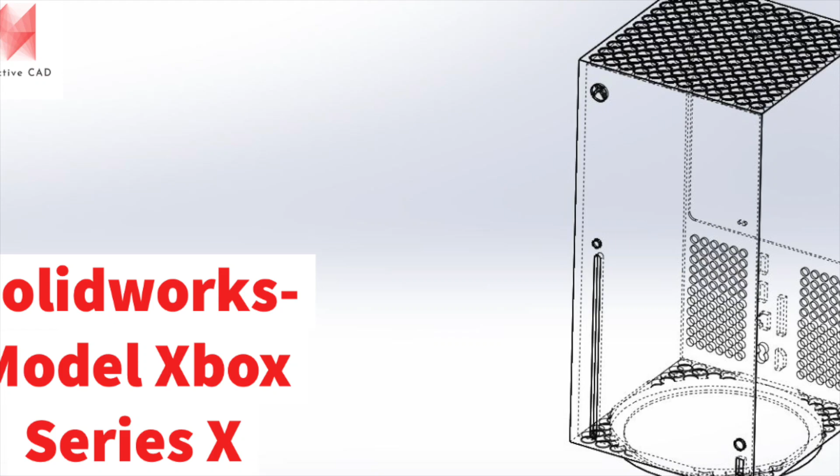Today I'm just going to do a quick video on how I go about drawing the new Xbox Series X in SolidWorks. It's a fairly simple shape, so it's not too complicated.

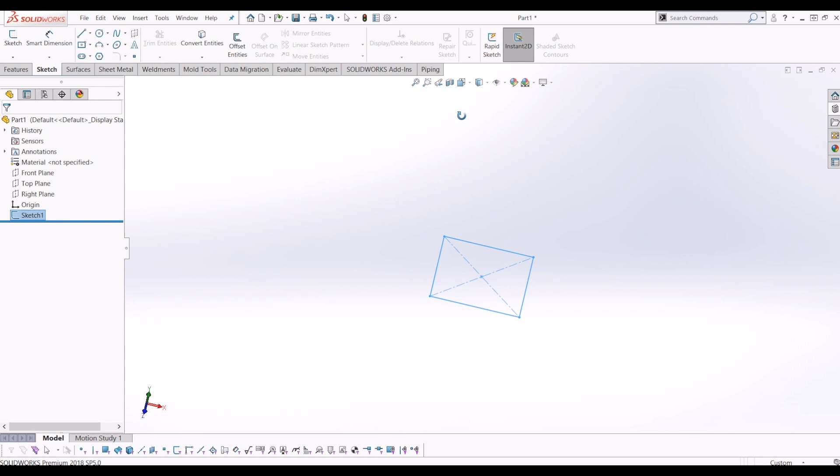Firstly I'd go to the top plane. Oh sorry, I've opened up a blank part file. And I go to the top plane, go to Sketch, and I'll just draw a box. I've got the rough, published dimensions of the Xbox, so I've got an idea of my scale. So 151 square, make that equal. I'll take that, and then I'm going to extrude down. So change the direction, 301.

Not 3.1, 301. There we go. So now, obviously, we're starting to get the base. That's the basic shape of the Xbox.

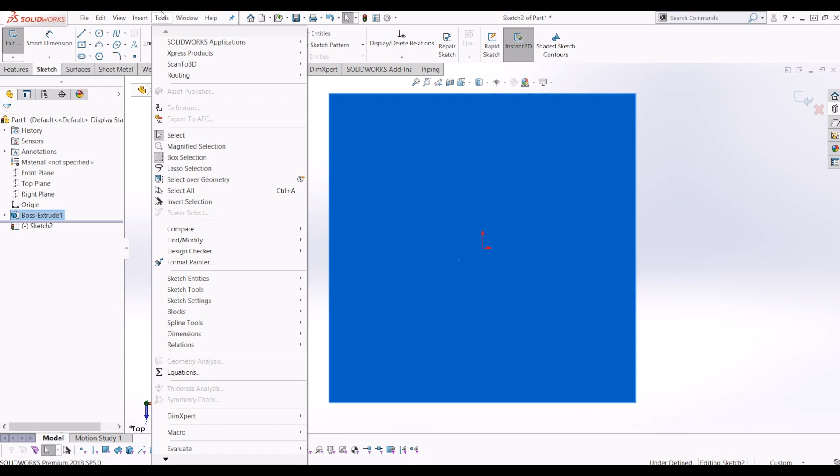But now I'm going to click on the top plane and add the finer detail. So I've just gone onto Sketch, and then I'm going to go to Tools, drop down to Sketch Tools, and go Sketch Picture. These are the pictures I've got to model the finer detailing of the Xbox without having the dims. As you can see, these are just Google image pictures. I've just Google searched Xbox Series X pictures, and these are the best I could find.

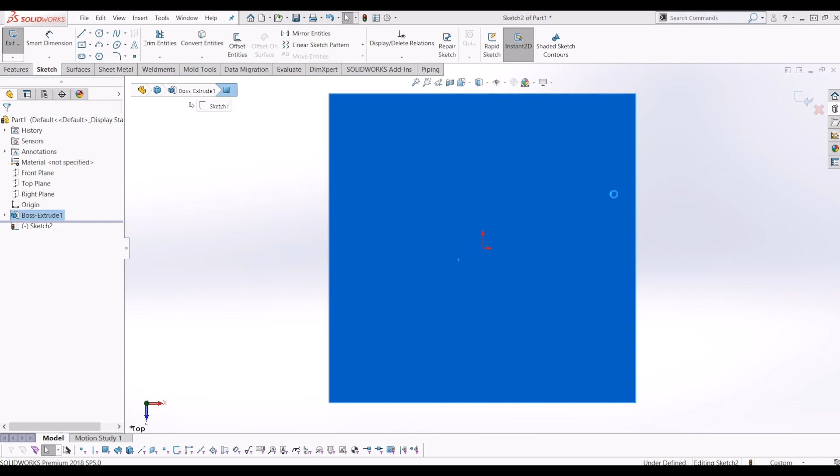So let's load that one in. And now we can actually trace around this picture. I've made this picture not ideal on purpose to show you how you can manipulate sketch pictures.

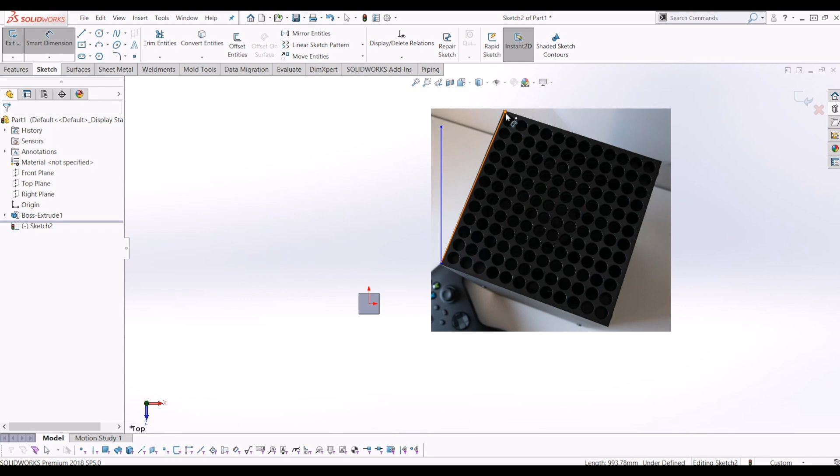So now I would actually exit this, tick that, then go to line and draw a line down the side of the Xbox and draw a horizontal line, and then just make that a bit neater. And then go to Smart Dimension and find out the angle. So 22.5 is the angle of the image. Double click the image to go back into your sketch picture.

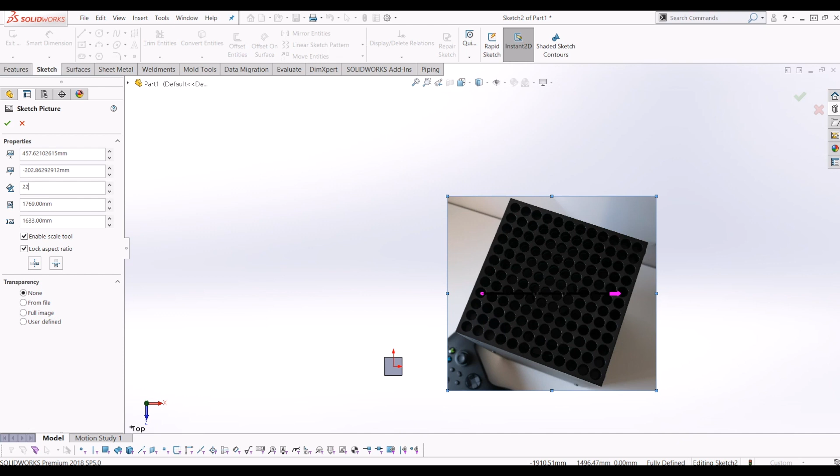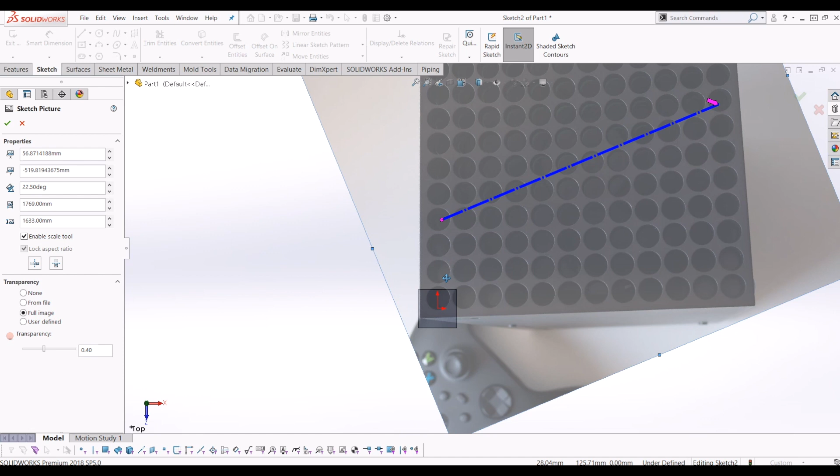I'm going to angle it at 22.5 degrees. So now I'm going to sit this picture and scale it down so I can use it as a reference on the actual model. From here, I'm going to go to transparency, full image, and then I'm just going to make it transparent so I could actually see the model. And then I'm going to drag it to the corner and scale it down.

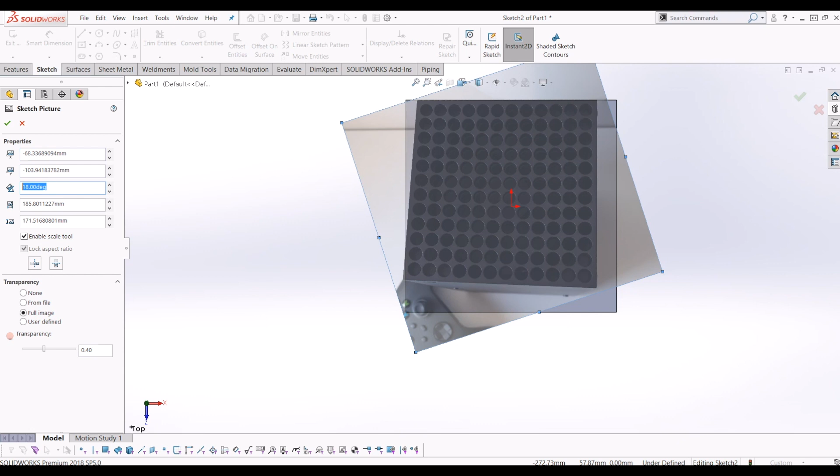Keep going, you might find that the angle's slightly off because this picture's not square, which you can see there, it's not perfect. So now if I make that, just fiddle with the angle a little bit. That's probably too much, try 19. So I'm going to just fiddle with this picture now and jump ahead, and then you'll obviously, by just editing the angle and the size, get it pretty much as flush as possible with the top of my model.

So I've just jumped ahead. That's probably the best I'm going to get it. If I just double click on the image, I've gone for 19 degrees and I've just changed the size of the image and kept it transparent. So I'm going to tick it.

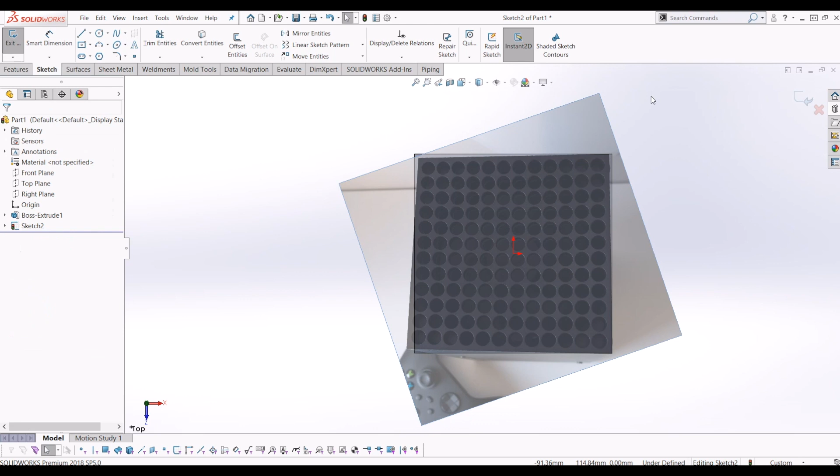I'm just going to quickly come out of this sketch and go to shell. So features, and then I'm going to go to shell. According to the internet, the casing's 6mm thick. And it's asking me for faces to remove. I don't want to remove any of these faces. So I'm just going to tick that, move it above my sketch.

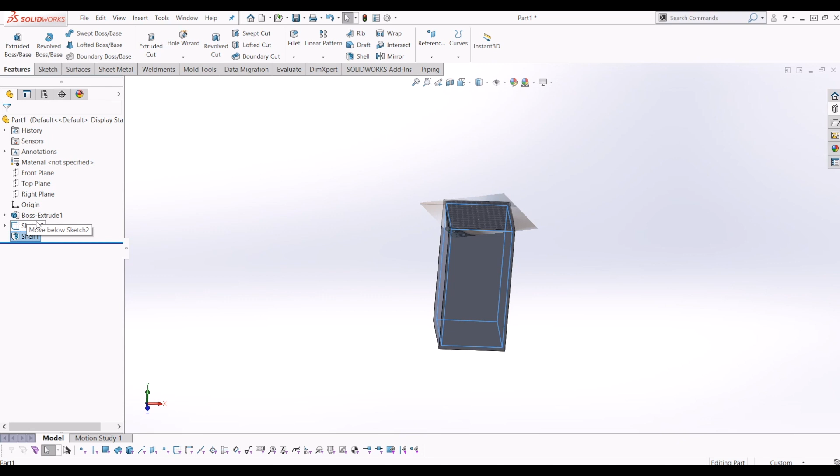And the shell has worked. You can see that now that's a hollow cube. If I put a section through it, just tick it, you can see that's now a hollow cube.

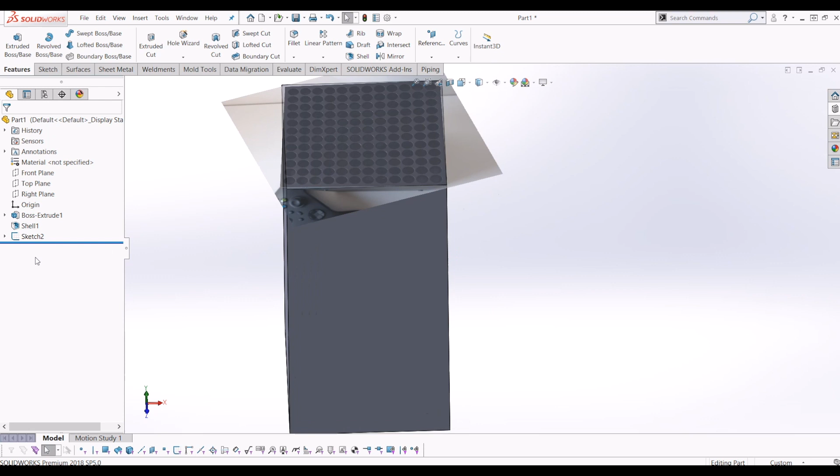So now I'm just going to go back into my top sketch with my reference picture. And I'm going to draw one circle. I'm going to do it 6mm radius, so 12mm diameter. And I'm going to do it looking at that. That's probably the best I'm going to get it for this reference picture.

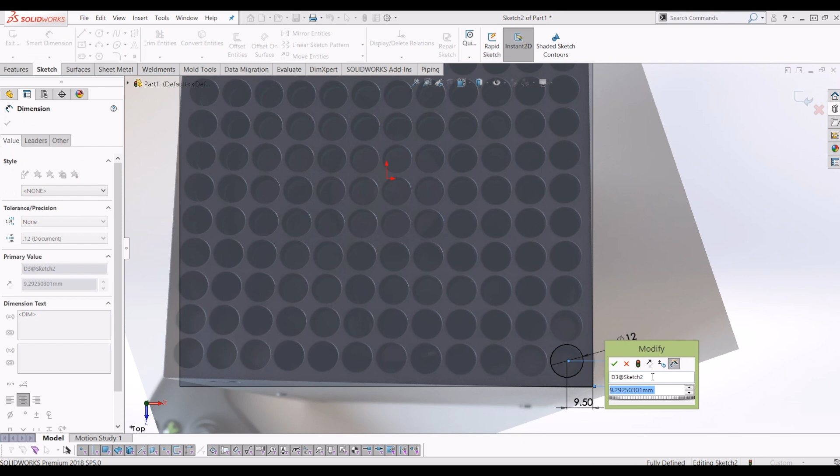Round it up to 9.5. So from there, I'm just going to go back to features and go to extrude cut. Click, and I'm going to go through all and tick it.

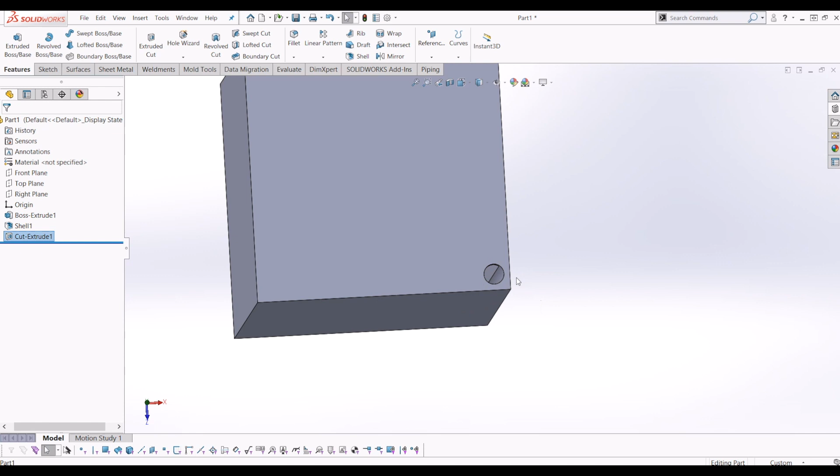So from there, I'm just going to put a little fillet on here. Not 10mm, 0.5. Little fillet on there as well. Tick that. So from there, I want to pattern my cut and my fillet. In fact, I'll put a fillet on the bottom as well.

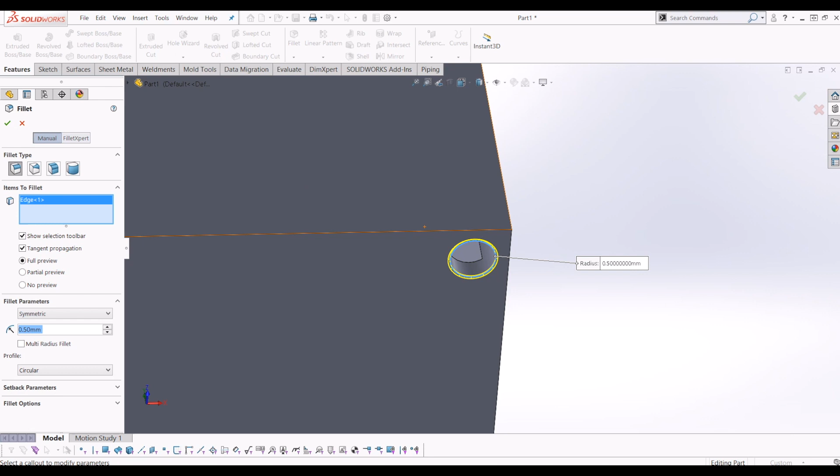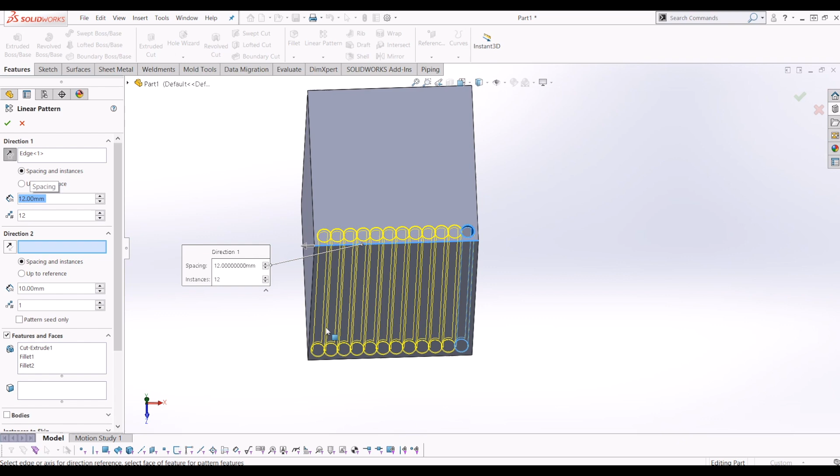Tick it. So from there, I'm going to pattern this - the cut extrude and the two fillets. So if I go up to linear pattern and click my direction, I want to go this way, and reverse the direction using the arrows. I'm going to put in 12mm apart, tick that - as you can see that won't work because they're overlapping, so I'm going to make the diameter of the circle a little bit smaller so it actually fits.

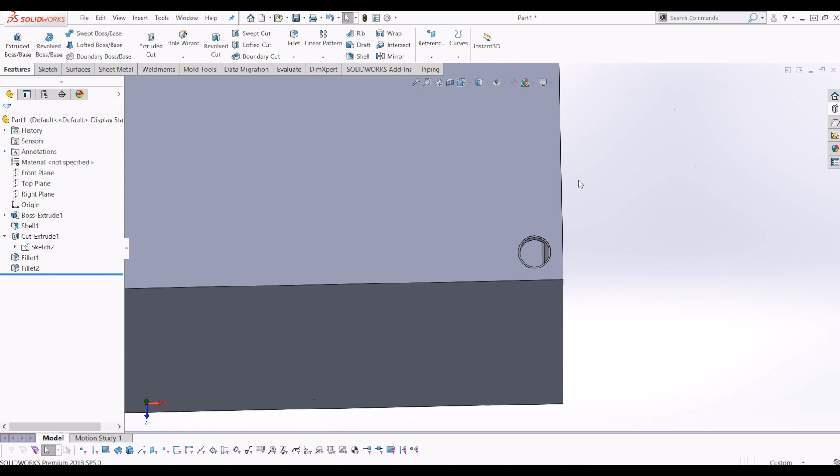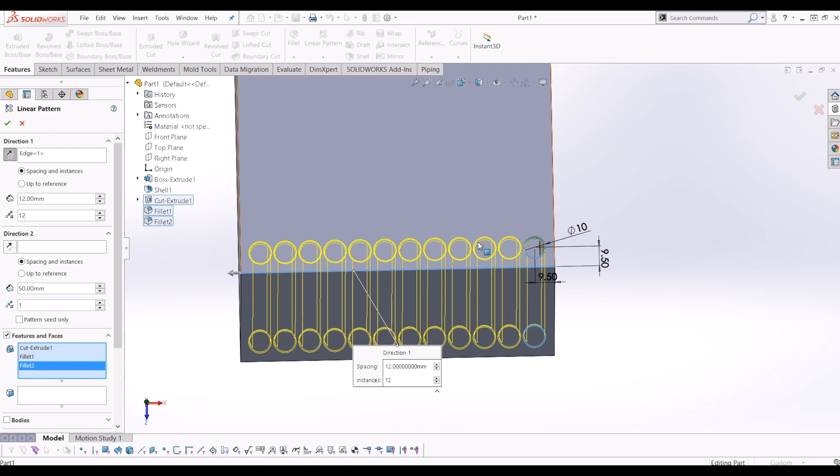So we'll go back to edit sketch, make the circle 10mm, and try that linear pattern again. So choose my direction and choose my features, which are the cut extrude and the two fillets, and do it 12mm - that's better. So I'm going to go in both directions - go to direction 2, click this line here, do the same again, 12mm, and tick it.

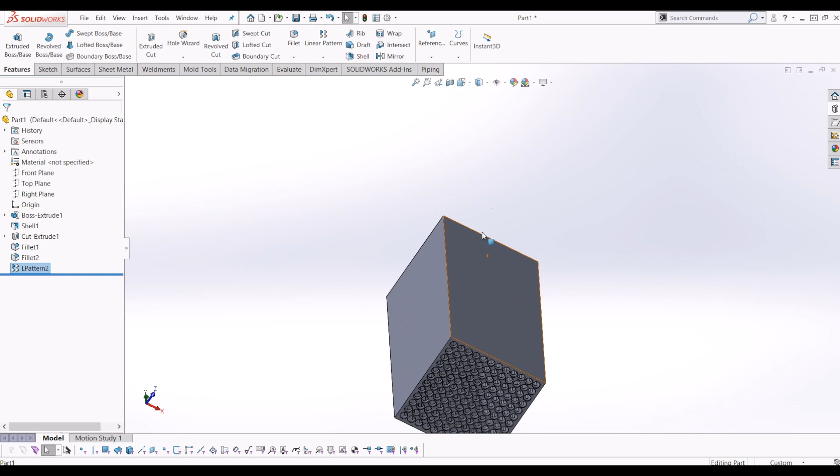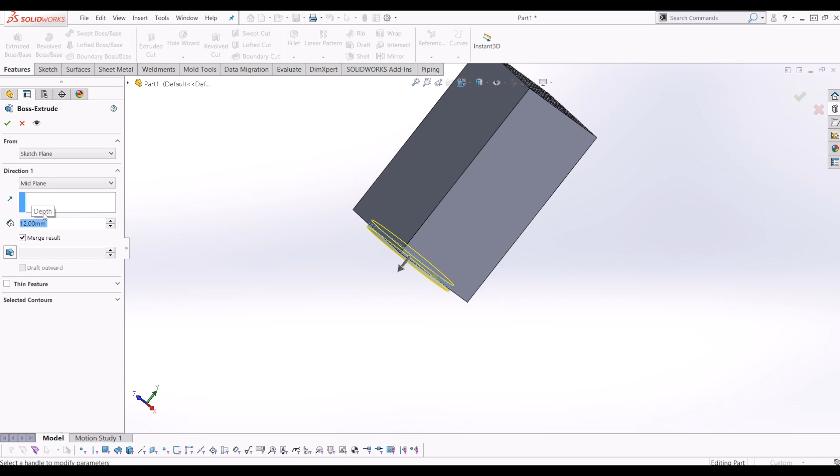Just let it load. So now I've put the vents in, and I'm going to go to the bottom of my Xbox. Just click the surface, go to sketch, and I'm going to put the base on. Click in the middle and extrude that base 6mm in both directions - go to mid plane and make it 12mm, so it's extruded out 6mm each side, and tick it.

And then just put a cut on the bottom of the Xbox as well, 10mm. Make that cut 6mm deep - no, sorry, we'll make it 2mm deep because it's only a little one.

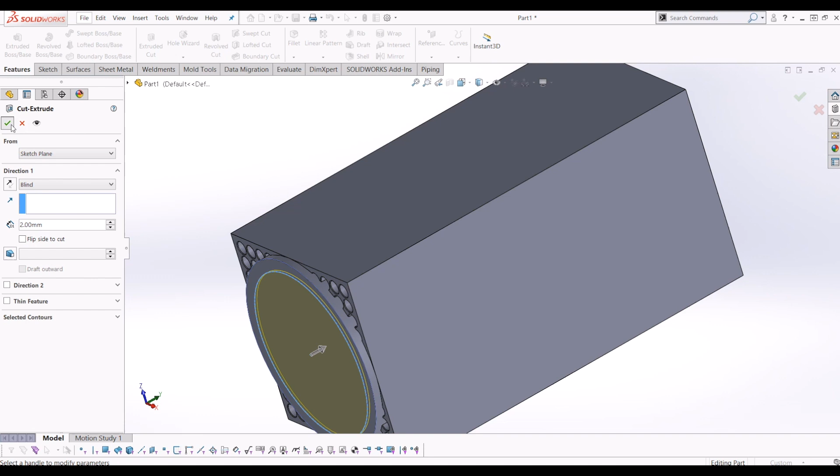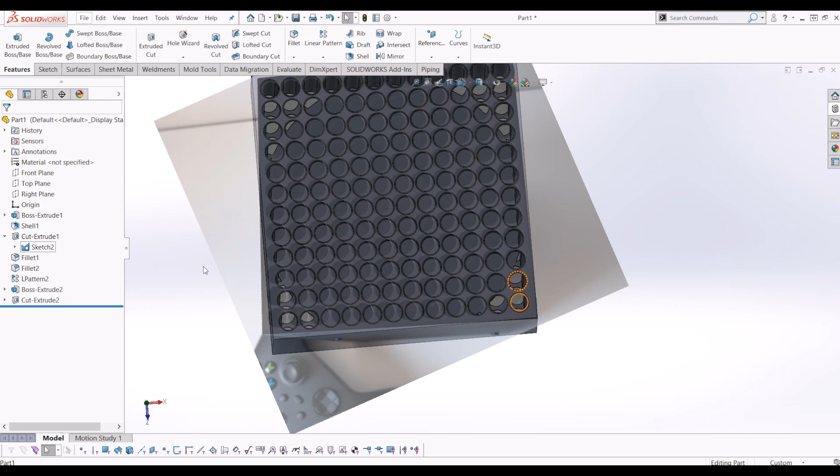So now if I go back to my cut sketch, just to give you an idea of how we're modeling it, I'll show that again. So now you can see I've got the grid. I know it's a bit out because obviously the picture's not square, but it's still a good reference on how many holes the Xbox actually has. So I'll hide that - so that's the vents on the bottom and the base modelled. I'll just hide that again and go to ISO view.

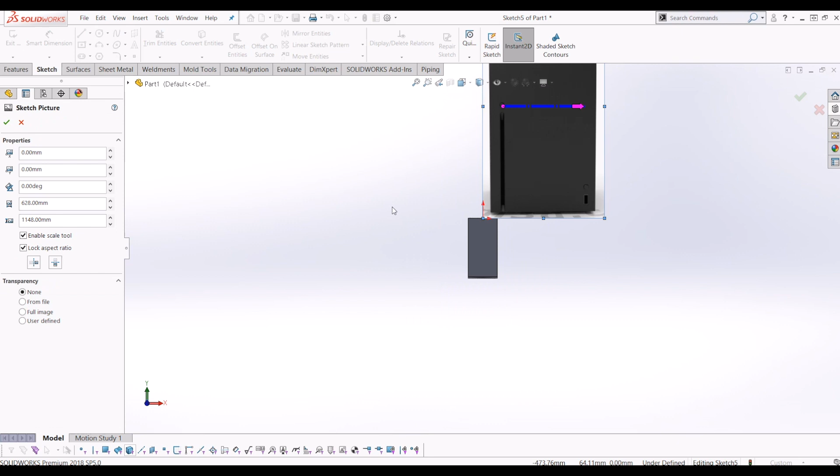So now I've modelled the vents on the bottom and the top. What I'm going to do is just go select the front - that's the front, click sketch. Now I'm going to go to tools again and drop down to sketch tools and go sketch picture. Select the front picture and do the same process again. I'll jump forward once I've tidied up and scaled down the picture. It's pretty self-explanatory again - go on full image to make it transparent. Your size is there, which you can change with your change in the graphics window, and your angle's there to change the angle.

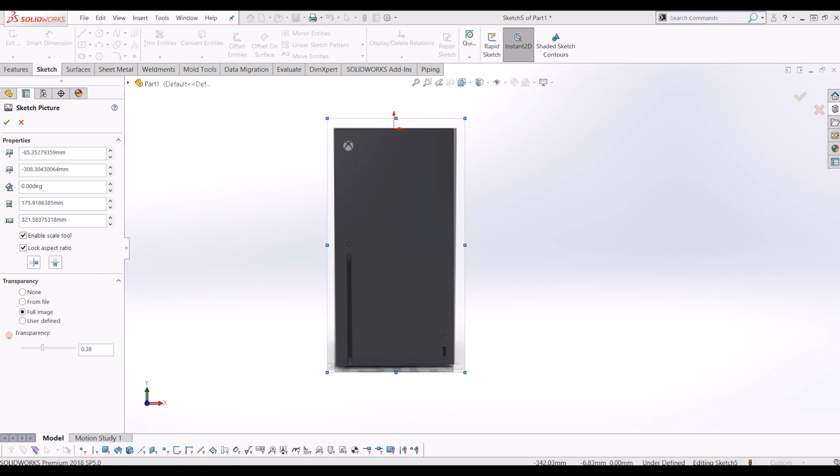So now I've lined it up, I'm going to create two sketches on the same face - one for the disk drive and the buttons, and one for the Xbox logo. So there's the sketch I've done.

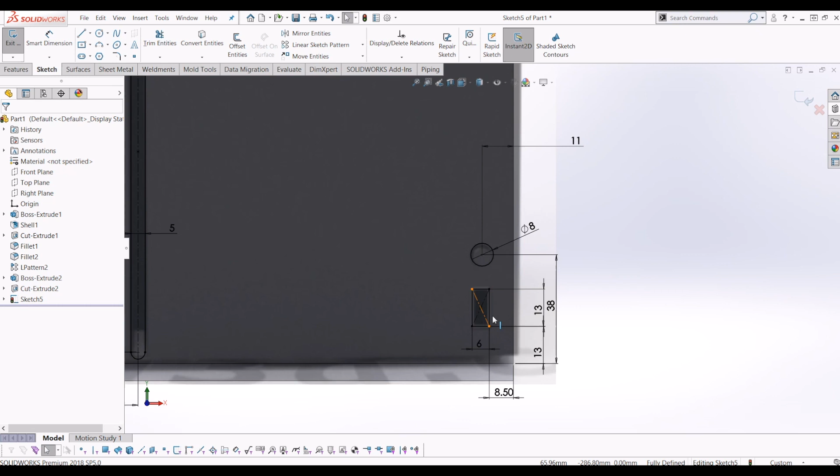So I've just done a slot - if you want to draw the slot, pause the video now, there's the dims I did it to. And down here for the USB and the button, I've done a square 6mm by 13mm and an 8mm button. So if you want to pause it there, just draw that bit up.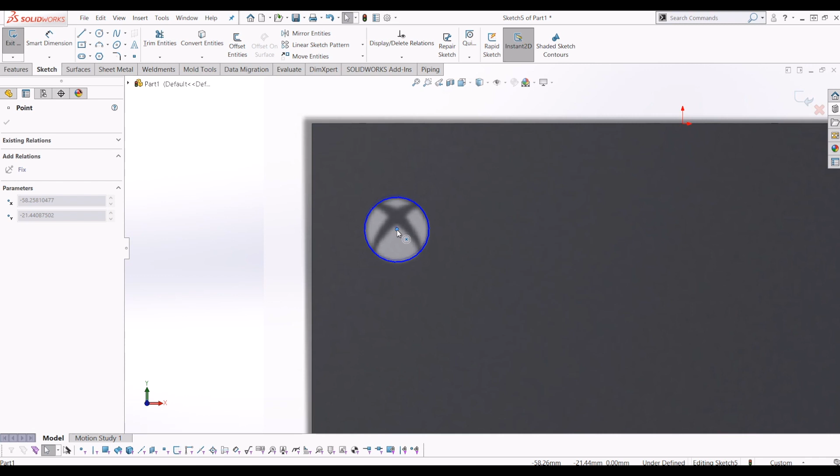And now I'm going to draw the Xbox logo. So if we just go to circle - if I zoom in, it gives an idea of the Xbox logo size. So it's 13mm I've got, and then I'm going to just define the circle from the edge - make it 22.

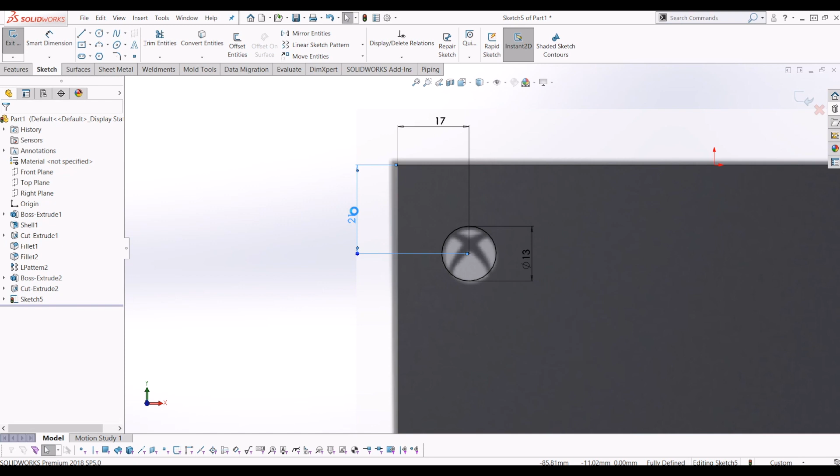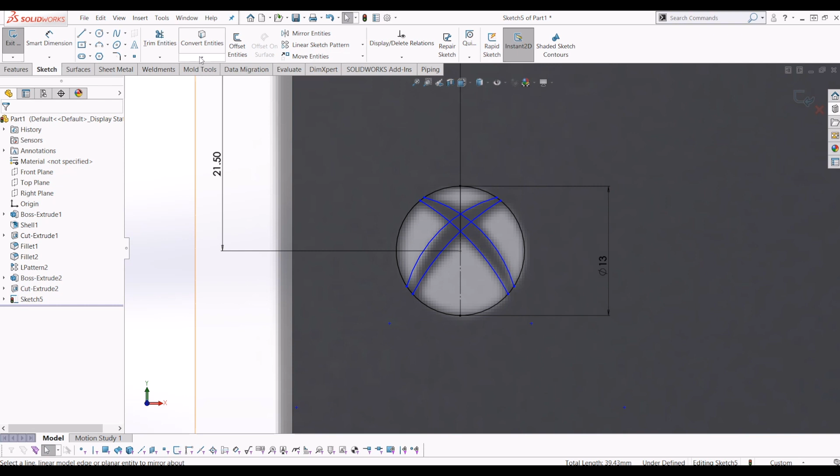And now I'm just going to draw in the actual X. So from there, I've just done two arcs, and then I've mirrored them around the center line of the circle. So tick that, and then I'm just going to trim here, here, here, and here to get the Xbox logo.

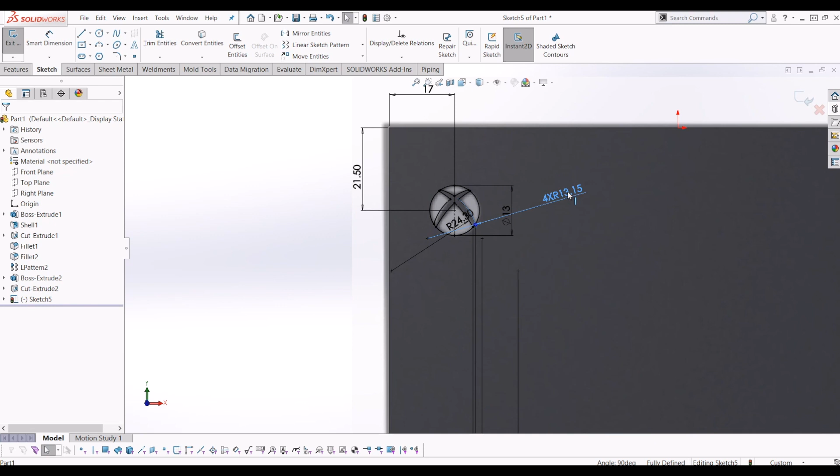Go up to display and delete relations, go fully defined sketch, and select the entities I want to fully define, and tick it. And there you go - it's putting some random dims just to fully define the sketch. Saves you watching me for hours defining the Xbox logo. So now if I come out of that, I'm going to use this sketch.

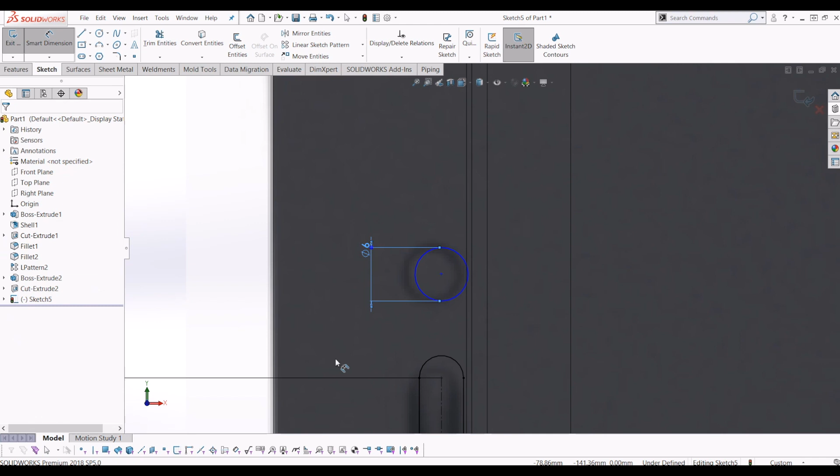Oh, I forgot, I'll just quickly go back in and draw that button - I forgot to put that button on. Just want to do it in line with the disk drive, even though it's a bit off because the picture's a bit off. So make that 6mm, just do it above the disk drive to 12mm, and move it to there - 19, that's fine. So tick that.

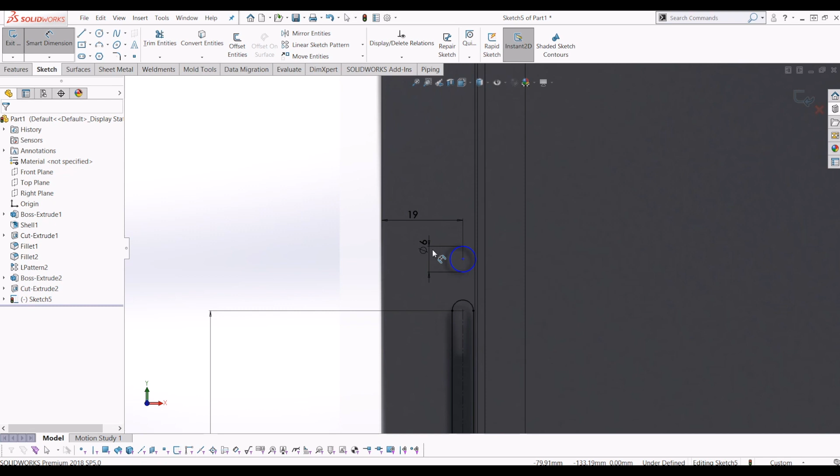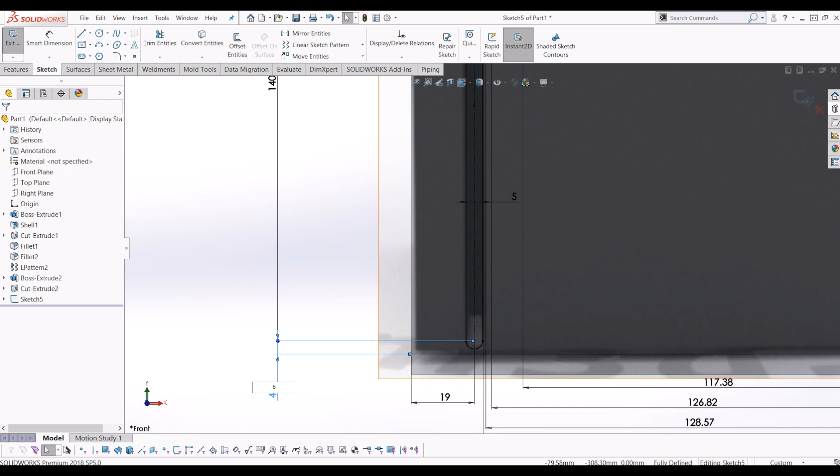There we go, so now I have a fully defined sketch. I know it's a bit messy, but I'm now going to use this sketch a couple of times to create features on the Xbox. I've just noticed down here, it needs to be at least 6mm up the disk drive, or else it'll collide with the wall of the box. So if I make that 6mm... in fact I need to make it 10mm, just a bit higher.

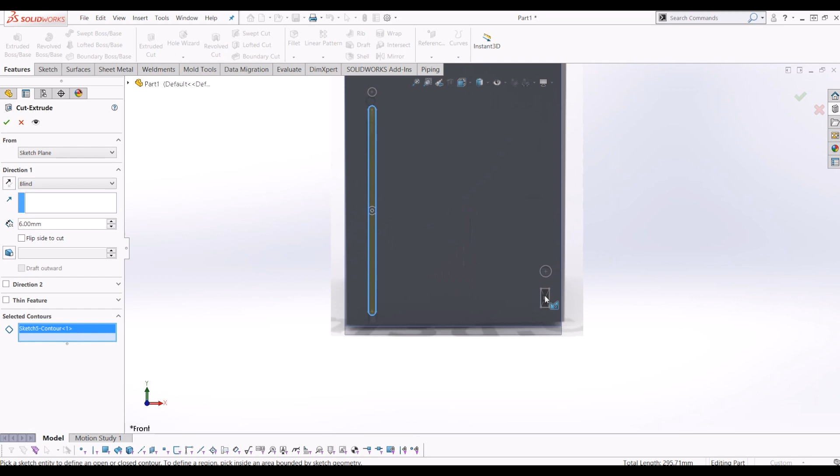So from there, I'll come out of the sketch and go to cut extrude. I'll click the sketch, and now it's asking for selected contours. I'll clear that off, and now select the parts of the sketch I want to use just to cut, then go blind 6mm through to cut through the front of the casing. I'll tick that.

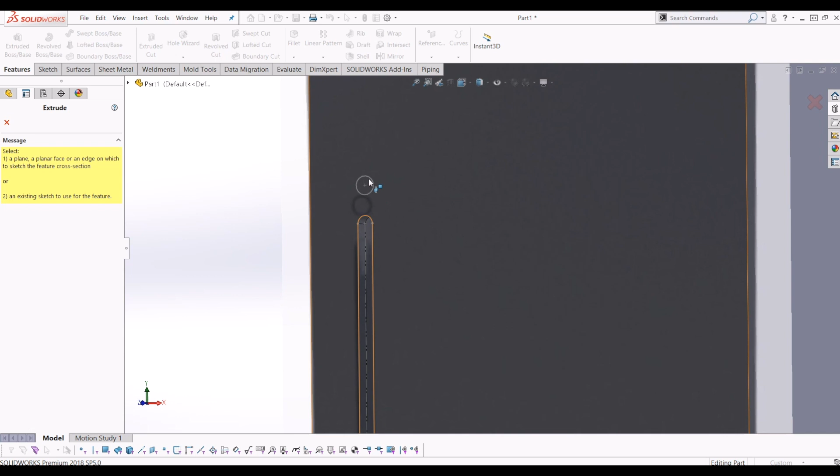Now I'm going to go to cut extrude 4, go to the sketch, and select show, so it comes up with the sketch again. Then I'll go to extrude and click the circle and the other circle. I'll go back to selected contours, click that circle as well, and make those buttons 2mm big.

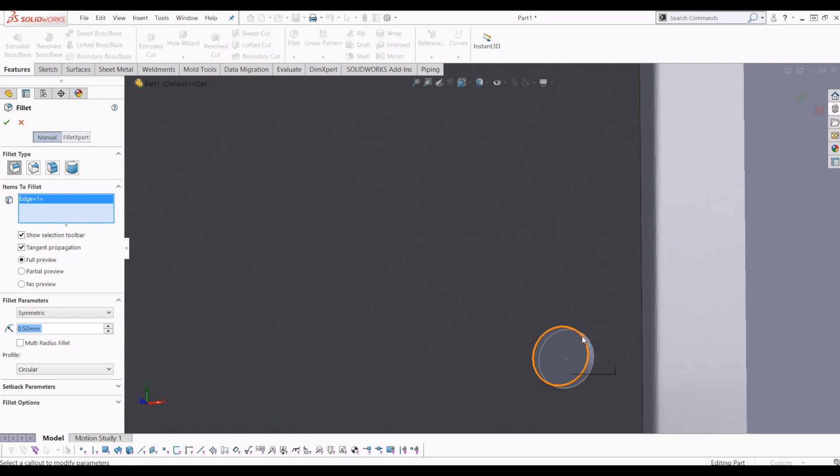Tick that, and then I'm going to put some fillets on the circles as well, so they're more button-like. And tick that. So the next thing I'll do is the Xbox logo at the top.

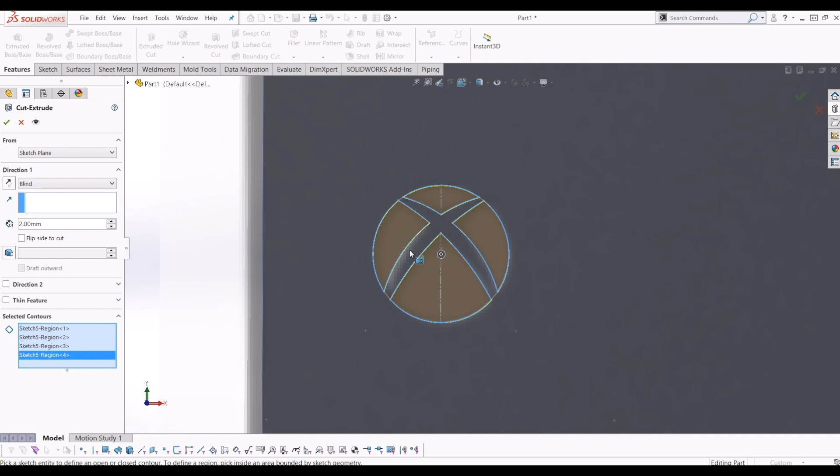So if I just go to extrude cut again, click the sketch again, and now clear out that contour, I'm going to select and make the parts of the Xbox logo and make that a 2mm deep cut there. So now if I hide the sketch, the front of the Xbox should start looking a bit like an Xbox, which it is.

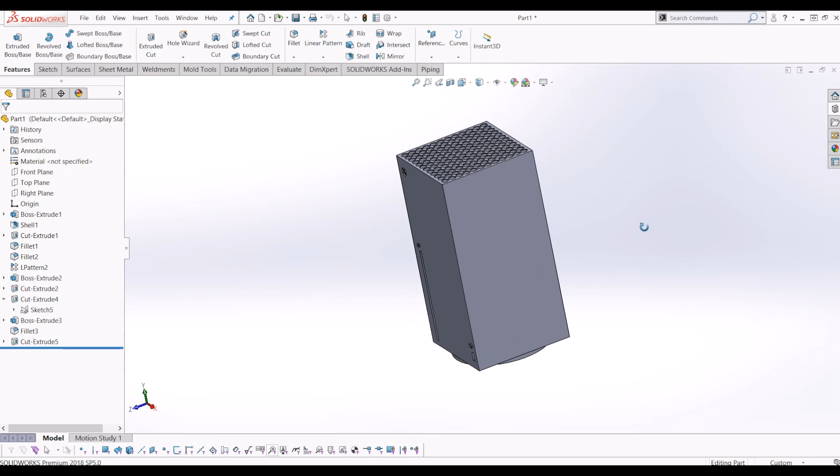So the last part of the Xbox to do is the back. If we follow the same principle, click the back face, go to sketch, tools, drop down to sketch tools, sketch picture, and then select the back picture I've got.

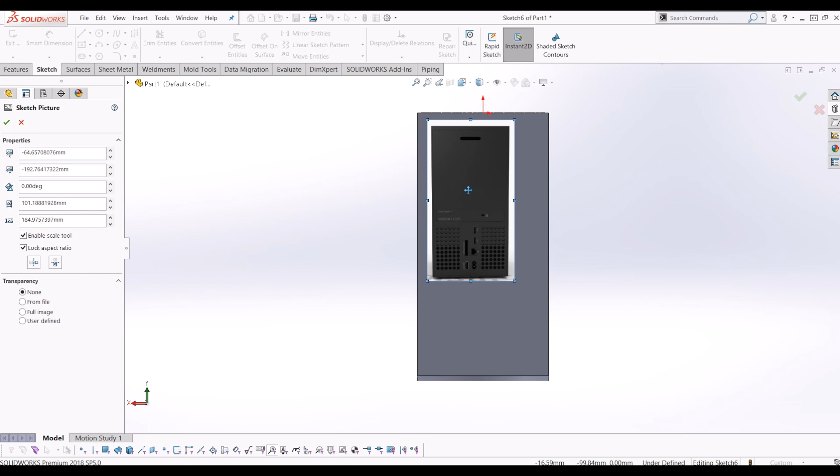This should be fairly simple to do. I'll just go full image again, make it transparent. Not that transparent - there we go.

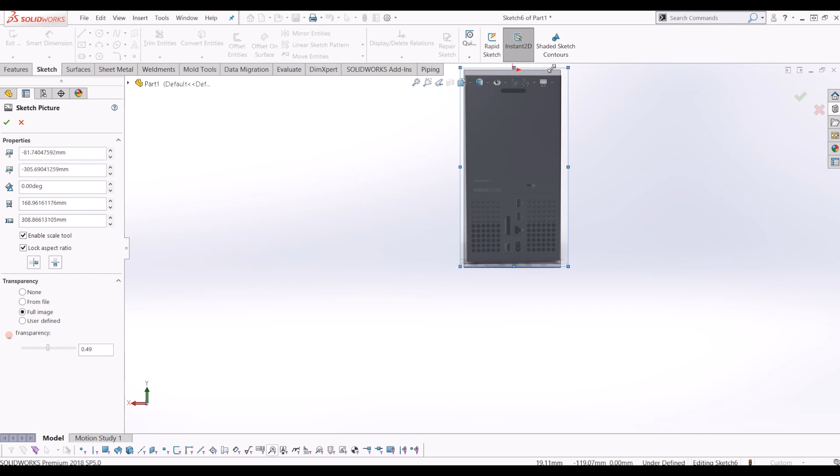And then I will adjust this image to fit. Same again, it's not perfectly square, since they're just Google images. If you want to do something a bit more accurate using the pictures, it's worth getting a picture that's square on. So I'll just do that and bring it up a little bit. There you go, so let's tick that.

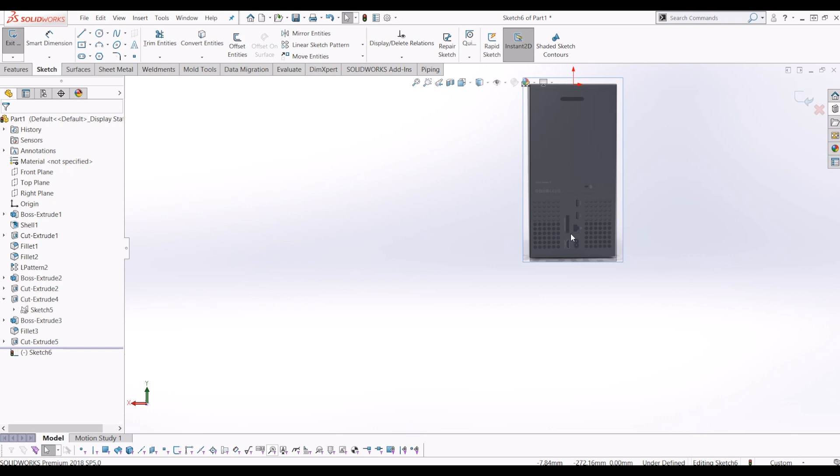So now I'm going to sketch and trace over this. This is the rather busy sketch I did for the back of the Xbox, so I'll just quickly go through it.

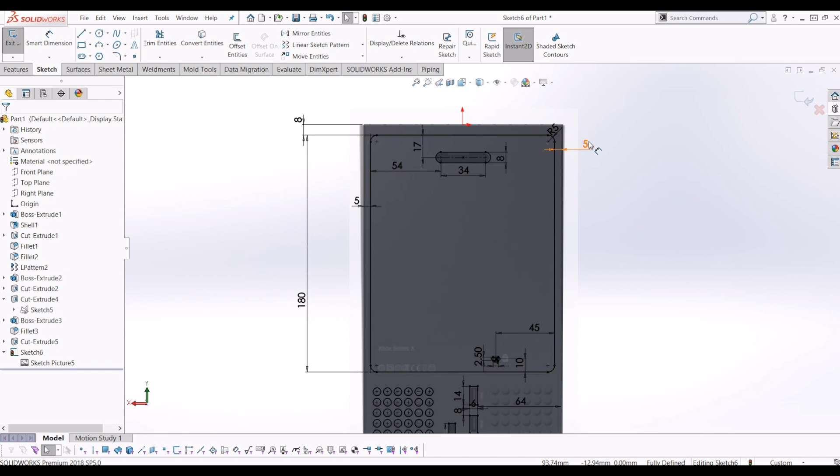For starters, I did a box 180, 5mm off the edge, and a 5mm radius around it. Then I did these - if you just want to pause the video and sketch that up.

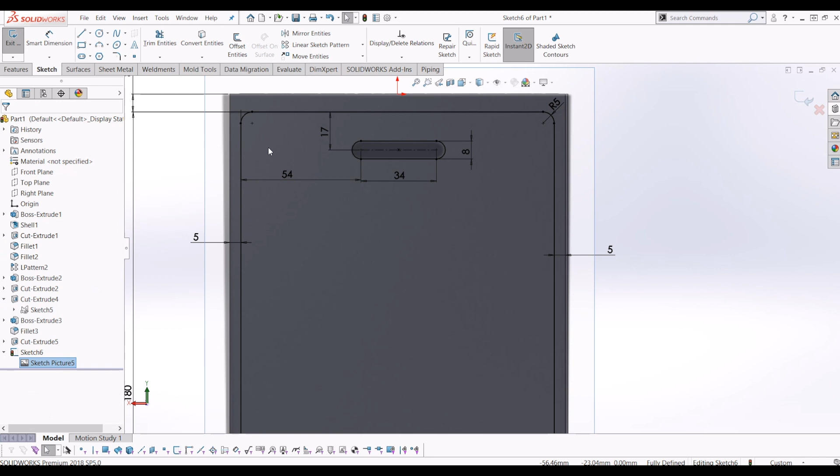And then from there, I did a slot, 34mm wide, 17 down from the top of the box, 54 and 8. So if you want to pause the video and draw that bit. And then the other more messy bit down here.

So we'll start with this slot here for your hard drive. That's 44 from the bottom, and I've done it 30 by 5. And then 65 from the edge there. So if you want to pause the video and just quickly draw that.

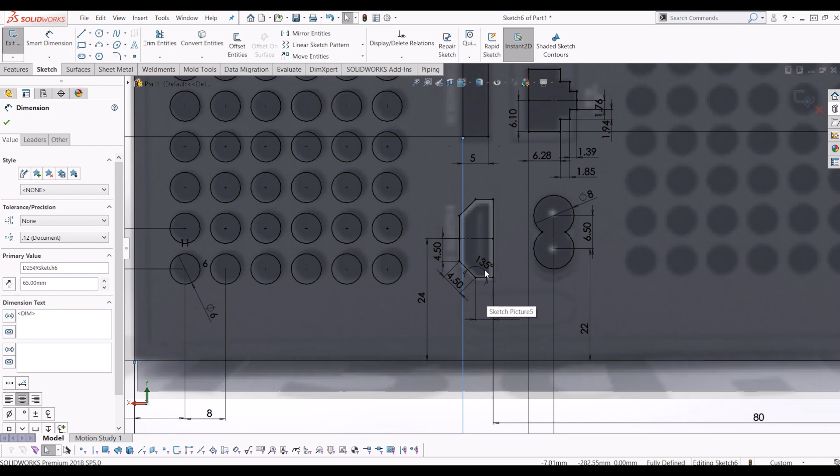And then from there, I've done the HDMI cable. I've actually mirrored this around the center, 4.5, 4.5, 135 degrees, and a 3.5. And then it's 24 from the bottom and 65 along - no sorry, 65 is for the hard drive slot, it's 80. I've done it 80mm from the edge. If you'd like to just pause that, I'll zoom in a bit on the complicated bit.

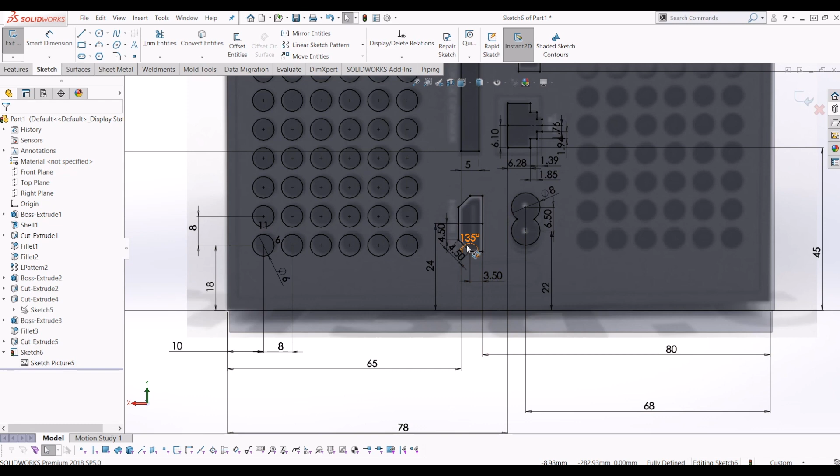Same again for the power outlet. I've done 2 circles, diameter 8mm. The centers are 6.5mm apart. I've done it 22mm from the bottom, and it's 68mm from the edge.

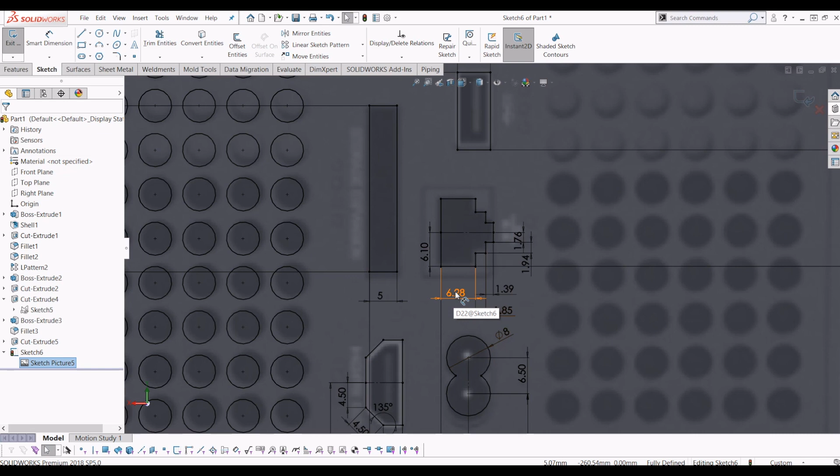So I'll do the LAN port now. I've just literally traced this off the picture: 6.28mm, 1.85, 1.39, 1.94. If you want to pause and quickly draw that up, I've mirrored it about the line.

And then this corner from here, to get the right dimension, is 78mm from the left hand side and 45mm high.

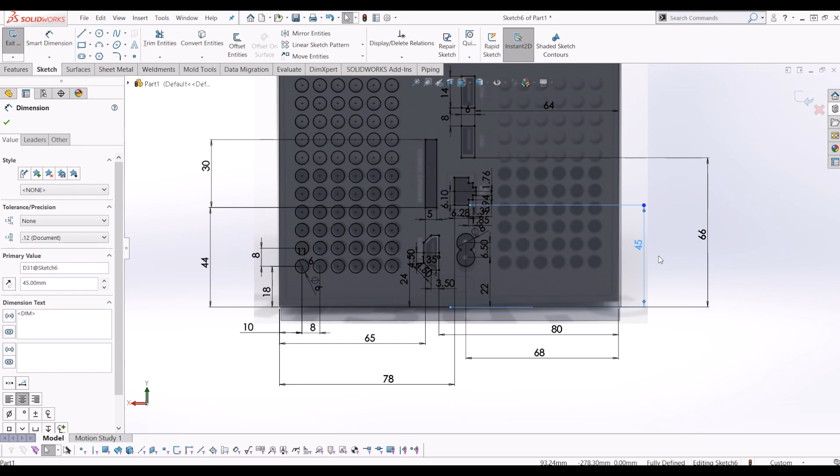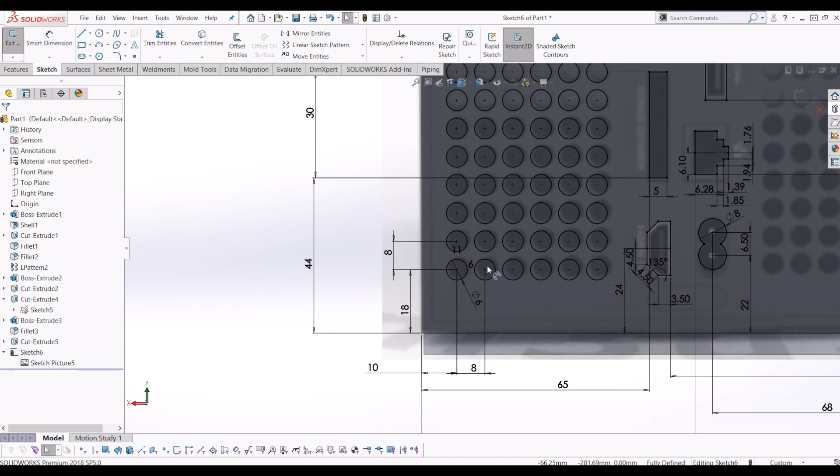So the vents, I've only drawn it on one side because I'm going to mirror it, is 18mm from the bottom, 8mm apart, and 6mm diameter, and I've patterned them 8mm apart. I've done 6 in the horizontal and 11 in the vertical, so there's 12 in total. I'll just leave that.

I'll zoom in on this bit. So there's 11 in the vertical, 12 altogether in the vertical, and 6 along this bit. If you just want to pause it and quickly draw that in and pattern it.

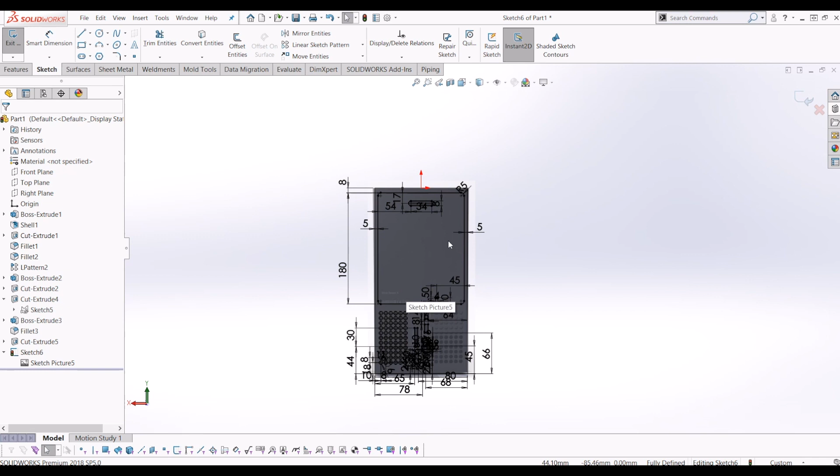So now I'm just going to start adding these features, and I'm going to use the same sketch over and over again. That's why it's quite a busy sketch, because it's going to do a lot on the back. So if I exit that, I'm going to do the holes first.

I'm going to go to extrude cut and select the contours I want to do. So 1, 2.

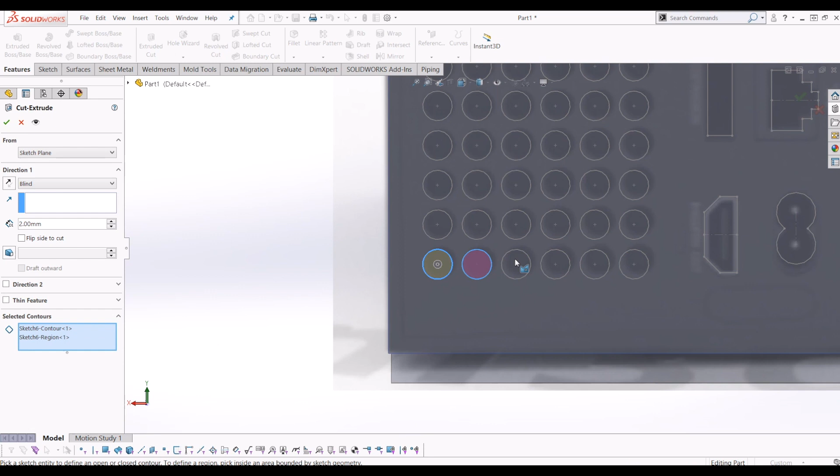I'm only going to go 6 up on this pattern because they're the only through vent holes, and then there's 2 vent holes.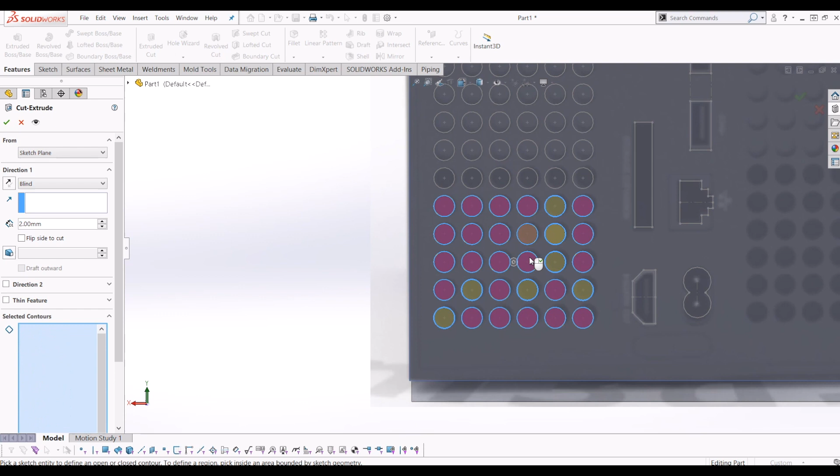As you can see, they're straight through, and then there's like dummy vent holes on the back of the box. So 1, 2, 3, 4, 5, and do the last row, 6.

I'm just going to go blind and make that 6 mil, and tick that. So now I've started drawing the back up.

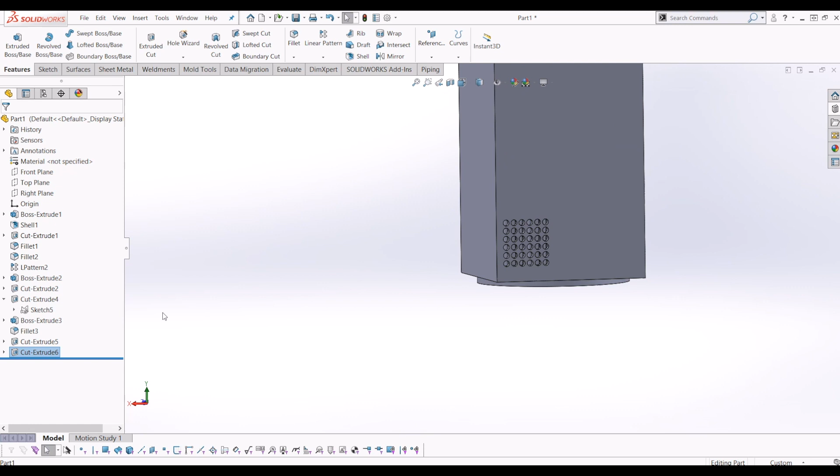I'm going to now go to my extrude cut, show that sketch again so I can see what I'm doing, and then go extrude cut again, and click this contour here and do the same again. Go to selected contours and select.

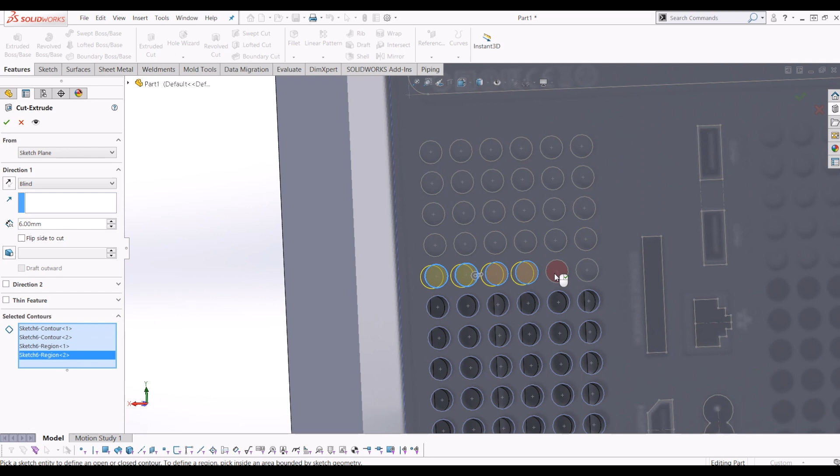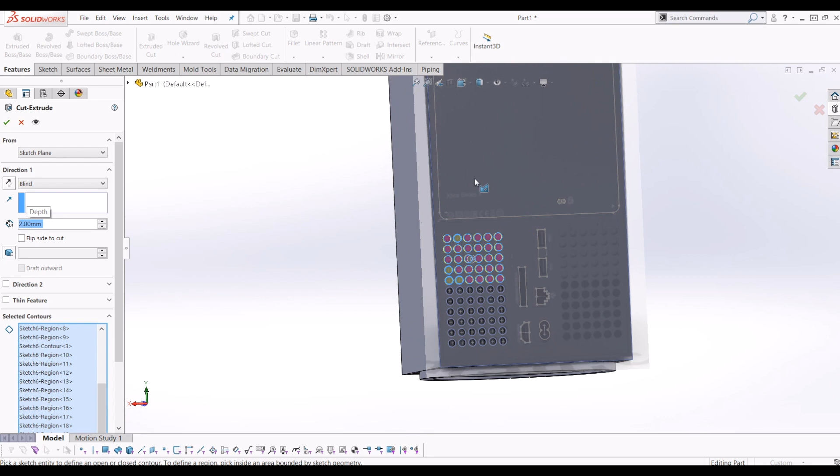The dummy holes, I'm going to make these 2 mil deep. I was also going to select this one as well because this is also 2 mil deep, but I want to mirror it, so I'm not going to.

So just tick that. Then go extrude cut again, make that 2 mil.

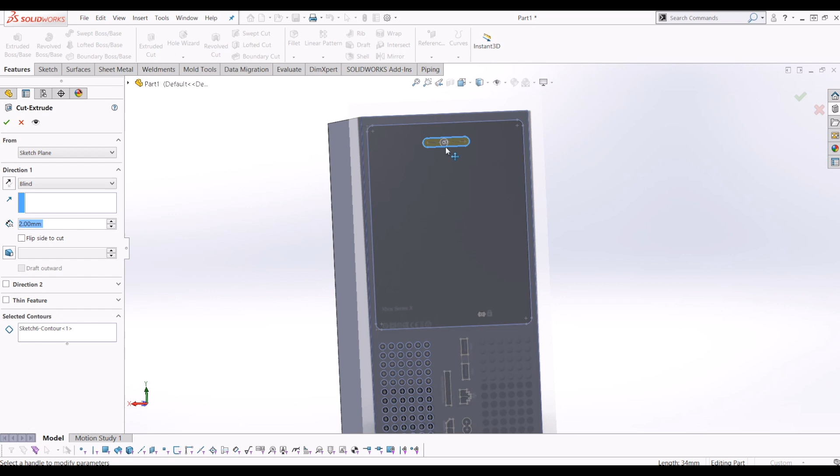And now I'm going to go extrude cut again, click the slots, and so now this is everything I want to cut the whole way through. So we'll do that slot. Go back to selected contours, select that slot.

Now, yeah, blind, 6 mil. So they're the holes. So now I want to mirror my holes.

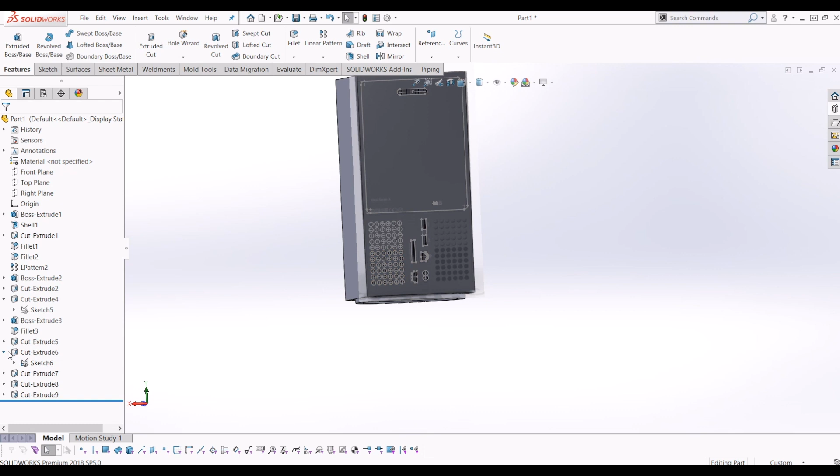So if I go to extrude 6, and then we just go to mirror, and then mirror it about the right plane.

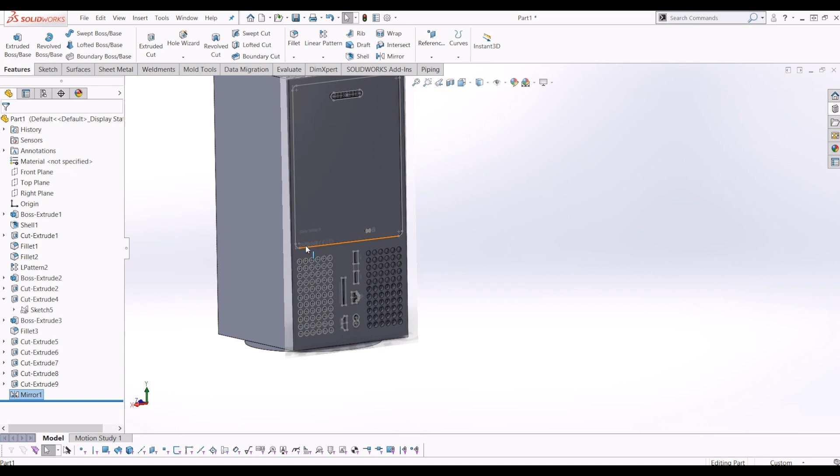So now if I hide the sketch, hopefully it'll start to look like an actual Xbox. Go down, right click on it, hide. So now we've got the detail on the back for the Xbox, and detail on the front.

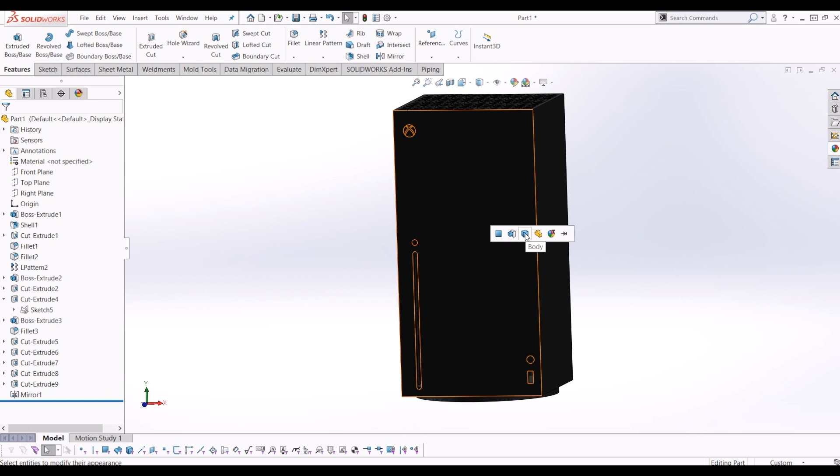So now just to put a few finishing touches on it, I'm going to go to colors and go plastic and make it black. Then click the surfaces of the Xbox logo, make them white.

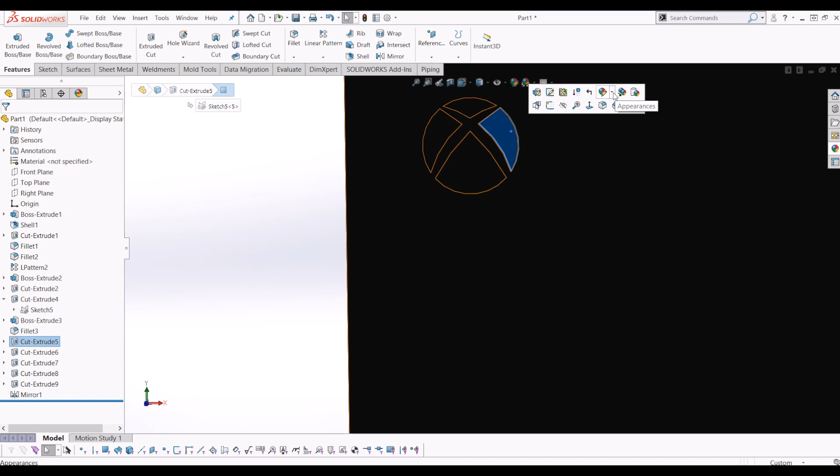Then just copy that. So if I go to appearances and then go copy appearance, click that, and then just paste this appearance.

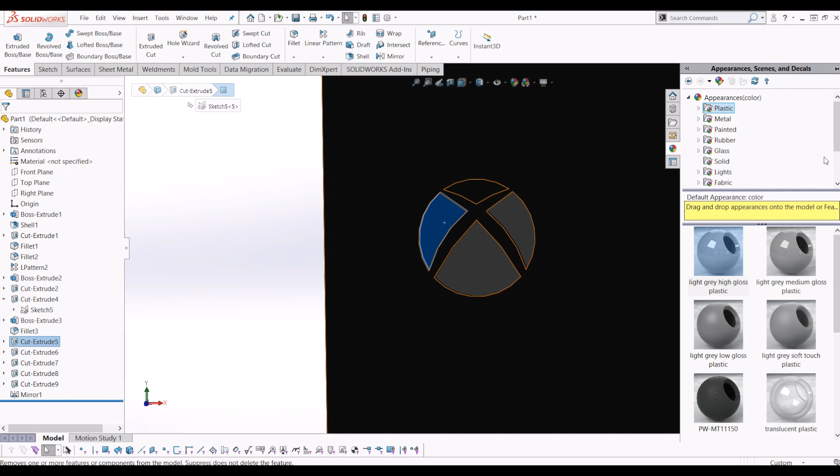I don't know why it's done that. It's not letting me paste it. So for the sake of the video, I'll just drag and drop to that face cut. But normally it should let you copy and paste your appearances. I don't know why it's not letting me. And paste cut.

So now if I go into a photorealistic view, it should actually look a bit like an Xbox. RealView Graphics.

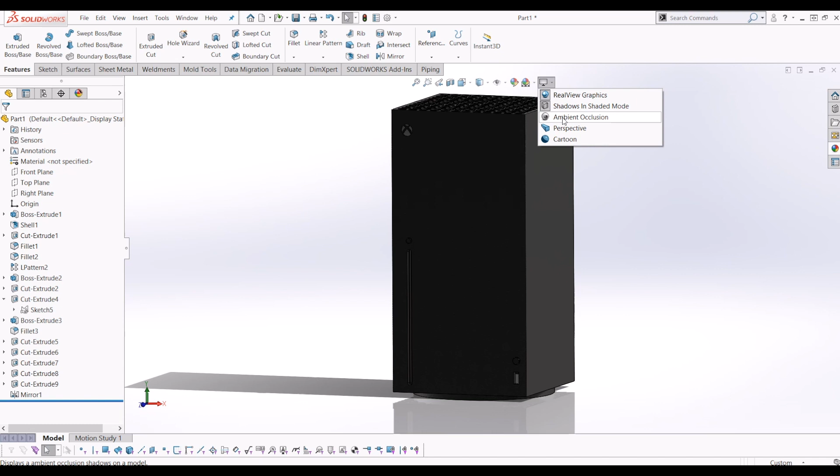So now I have a very simple model of an Xbox Series X. I found this tutorial helpful.